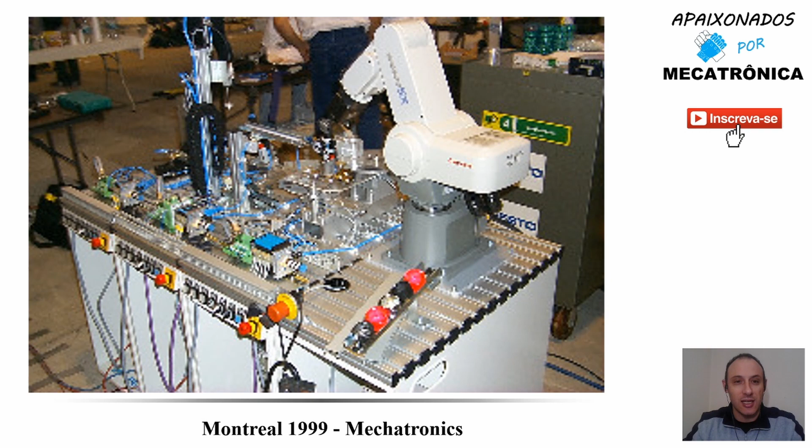Hello, Mechatronics lovers. Today, let's discover the details about the Mechatronics Competition in Montreal, 1999. Let's discover details about this test project and the reasons why these teams, Korea, Switzerland, and Brazil, finished on the podium. Stay tuned.

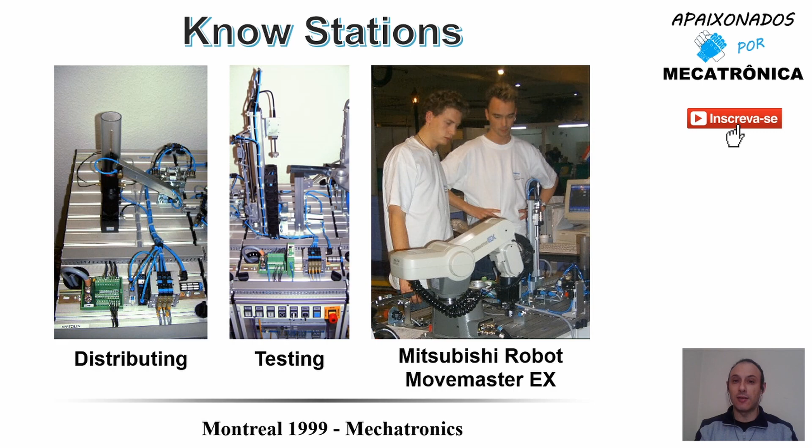So in 1999, we have the WorldSkills Competition in Montreal, Canada. In the Mechatronics Competition, we have 20 teams participating in Montreal. The stations were distributing, testing, and a Mitsubishi Robot Movemaster model. The unknown station was the filling station, responsible for delivering coins.

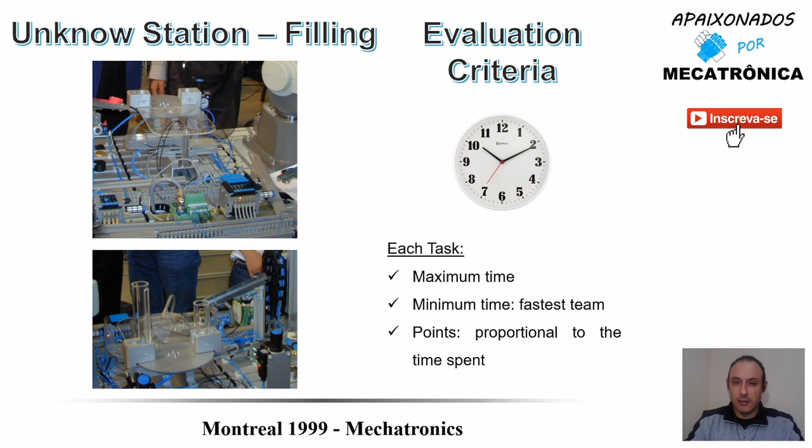The main, or only, evaluation criteria was time. Each task had a maximum time, and the minimum time was established by the fastest team. The points each team received were proportional to the time spent. If the team didn't finish the task, unfortunately they received 0 points.

So in task 1, the task is assembly of the distribution and test station, and demonstrating the function using SimuBox. The maximum time was 3 hours for 8 points. In the image, we have the Brazilian team, Adriano and Folha, in action.

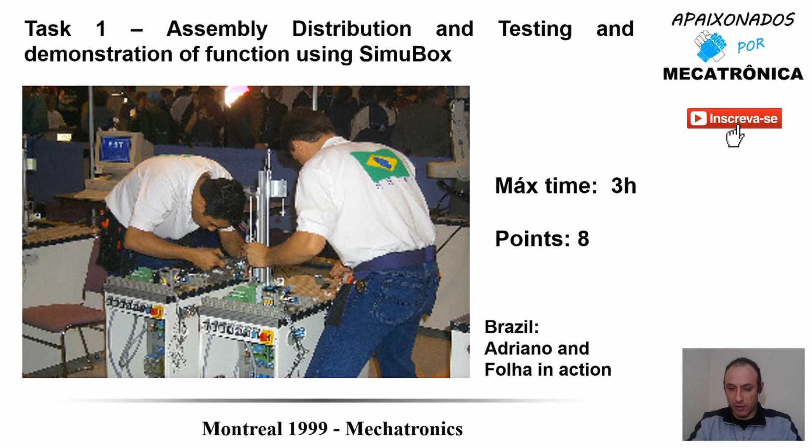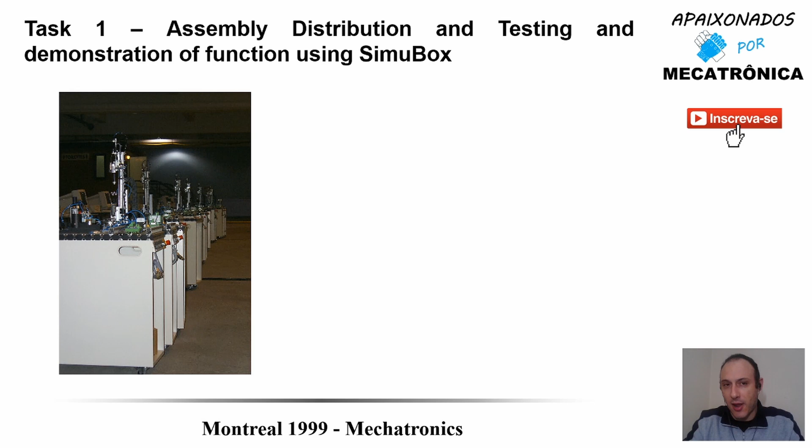During the familiarization day, these two stations, distribution and testing, are already assembled, and the teams test mechanical and pneumatic functions using a prepared standard software. In the second moment of the familiarization day, the teams need to disassemble the stations.

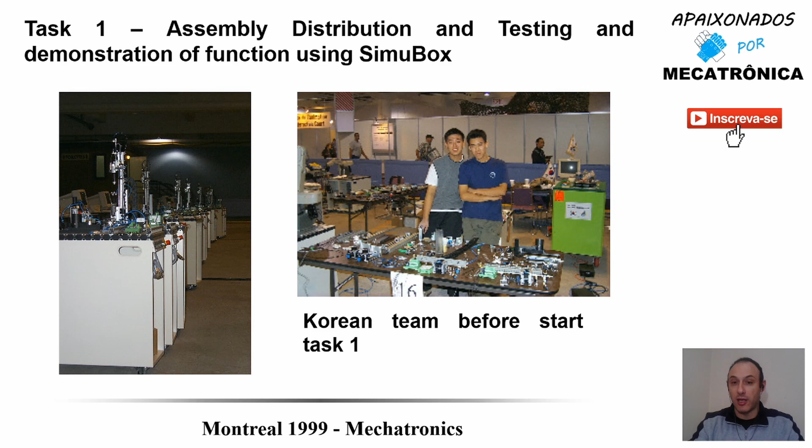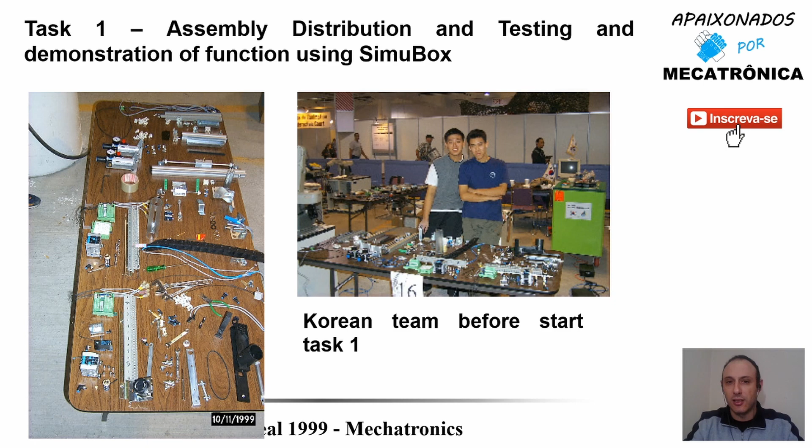The image shows the Korean team ready to start task 1, closer to the table, showing the level of disassembling the components. Today in WorldSkills, the disassembled parts are already prepared in a box. It's no longer necessary to disassemble any station during the familiarization day.

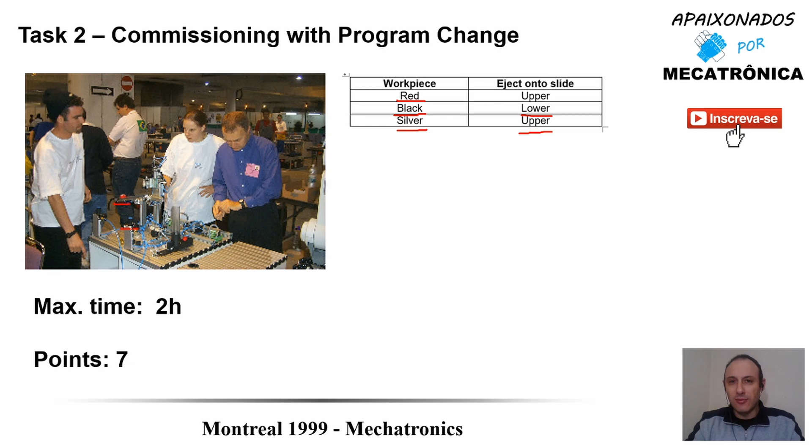Workpiece red and workpiece silver must eject to the upper slide, and workpiece black to the lower slide in the testing station. This is the upper slide and the lower slide — that's the normal function, and there are two more interesting functions.

Watchdog timer function for actuators of the distribution station — for example, the swivel drive. If the swivel drive starts the movement and doesn't arrive at the end position in 5 seconds, the system stops and flashes the lamp. The same applies for the vacuum. This is a good function.

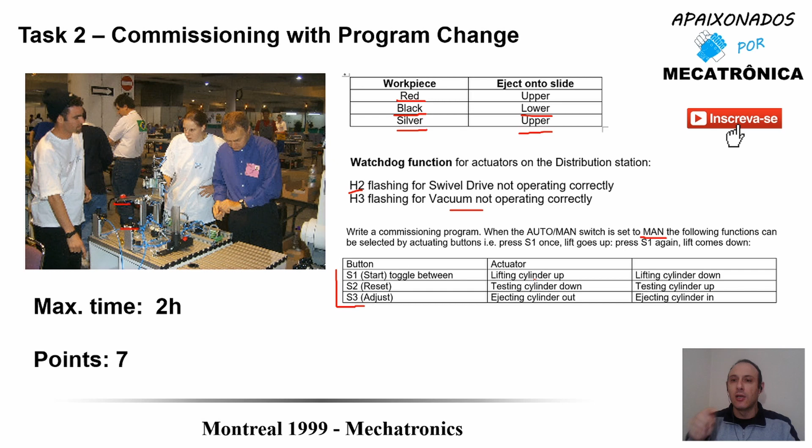The other function is the manual position of the switch — a test mode like that, using buttons S1, S2, and S3 to turn on or turn off the cylinders, the actuators of the testing station. One touch on start lifts the cylinder up, and another touch — this is named the toggle function — lifts it down. This is a very good function too.

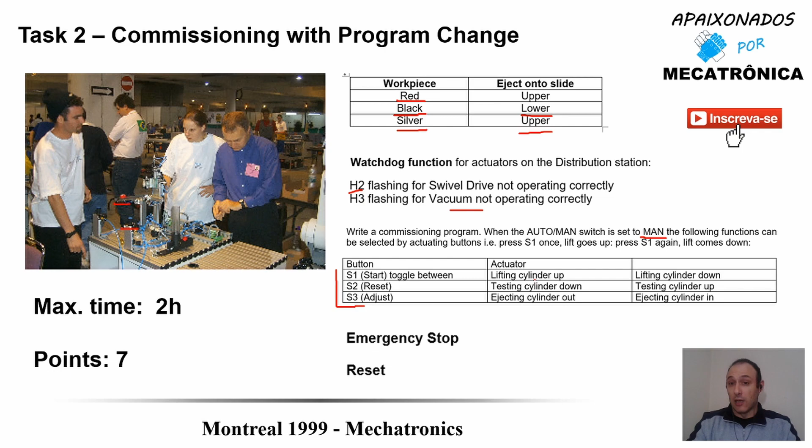And there are also emergency stop and reset functions — a lot of functions in 2 hours. The result was very impressive: Korea finished in 23 minutes, very, very impressive. Switzerland and Brazil finished in half an hour — very, very good.

So this was the results. I only showed the first 10 positions in each task.

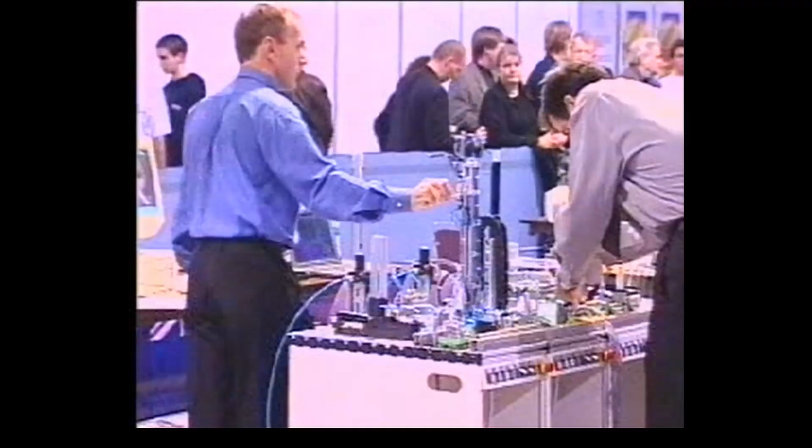The end task of the day was troubleshooting, individual, with a maximum time of 1 hour. How does this kind of task work? Experts insert non-destructive defects — mechanical, pneumatic, or electrical — and competitors must find and fix these defects, putting the system back to working order in the minimum time possible.

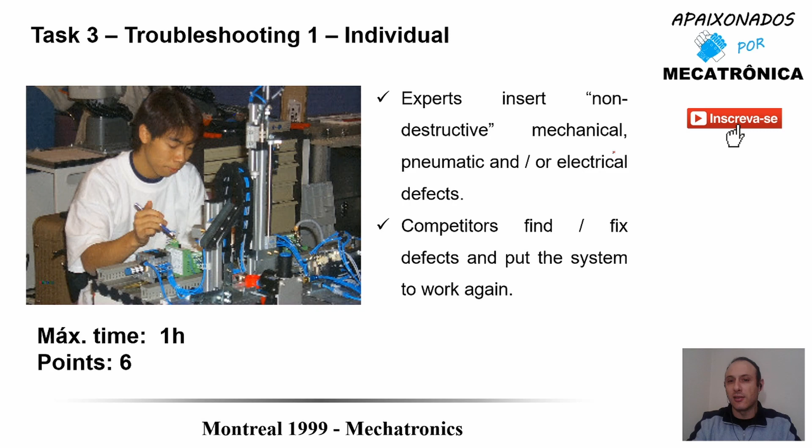Normally 3 or 4 defects were inserted into the station, and the result was very impressive — another impressive result. Switzerland spent only 5 minutes to finish, a very good time. Norway, Brazil, Korea, and Singapore finished in 7 and 8 minutes, also very good.

After day 1, with 21 points disputed, the ranking showed Switzerland and Korea in a tied first position — only a 0.03 point difference, basically no difference. Singapore, Brazil, and Taiwan scored more than 80%. This result from day 1 showed which teams were disputing the medals.

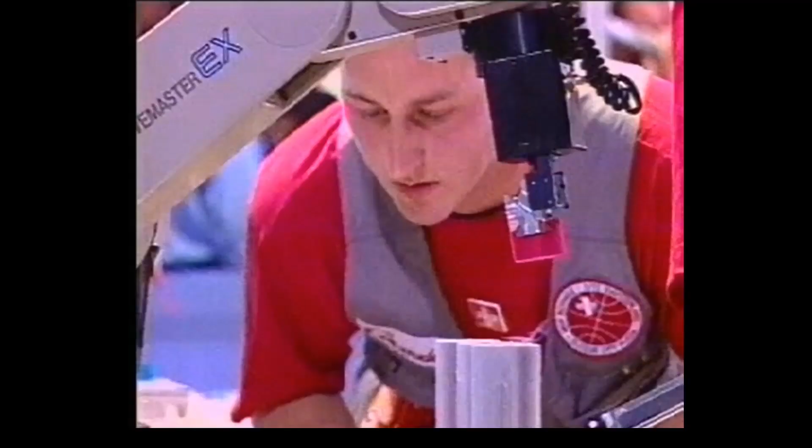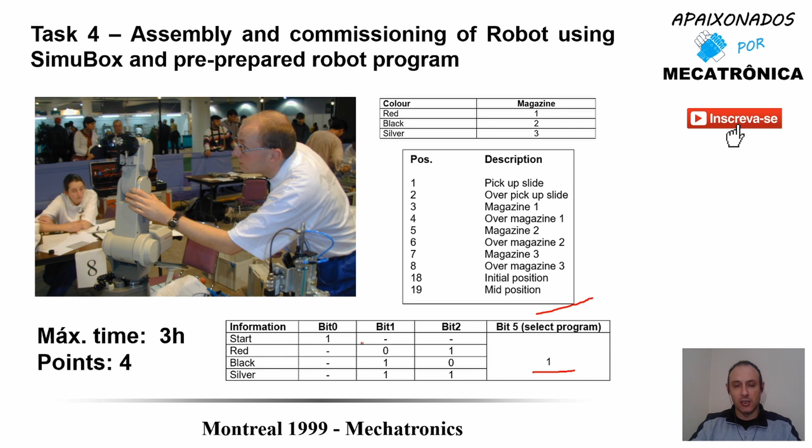Let's continue to task 4. Task 4 is assembling and commissioning the robot using SimuBox and a prepared robot program. The teams must teach the robot's positions according to a given list, using a pre-prepared robot program — selecting the program and inputting the workpiece information, so the robot will sort the workpiece into different magazines according to this information.

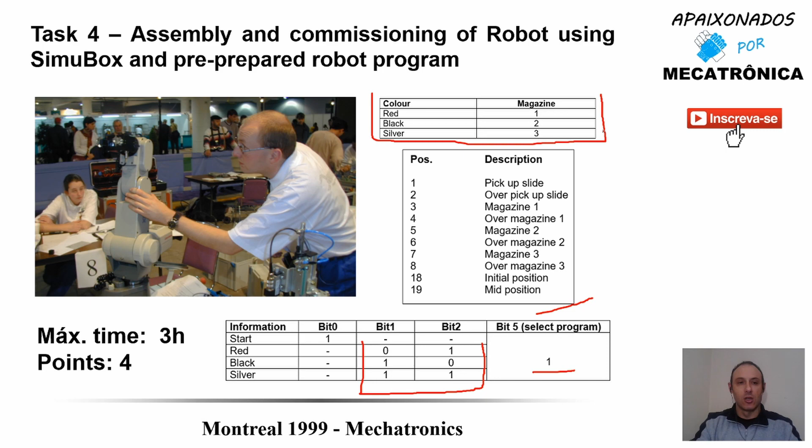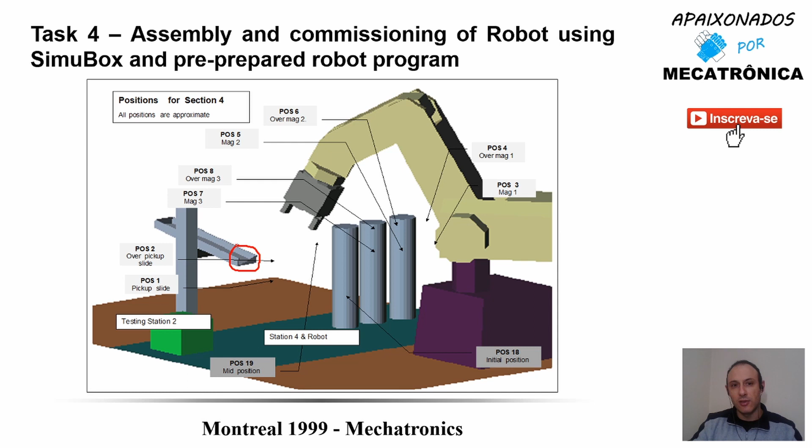Only 4 points and 3 hours to do this. In 1999, we already had CAD software, but at this moment it was simple CAD, and the information was on this paper. It's possible to see the positions and the components: magazine, slide, and robot. The robot takes the workpiece from this position and then sorts it into the magazines.

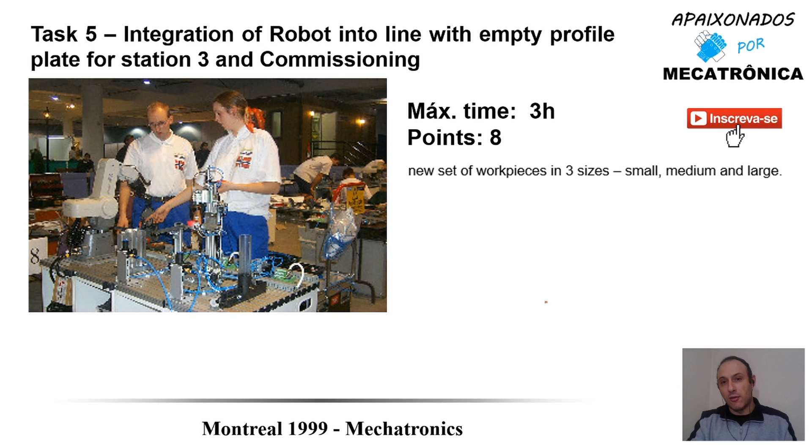Continuing, task 5: integration of the robot into a line and commissioning the system. This was a very interesting and very difficult task, because the line is complete with distribution, testing, and robot. But another point - not only the integration, the functioning changed, because new workpieces in 3 sizes were used: small, medium, and large, according to the height.

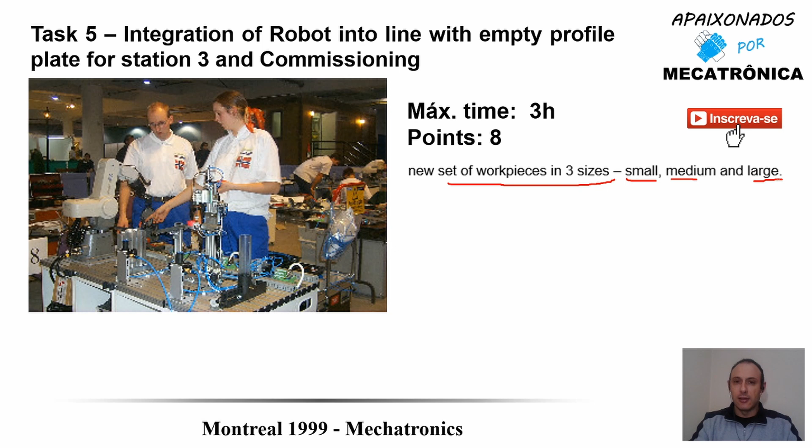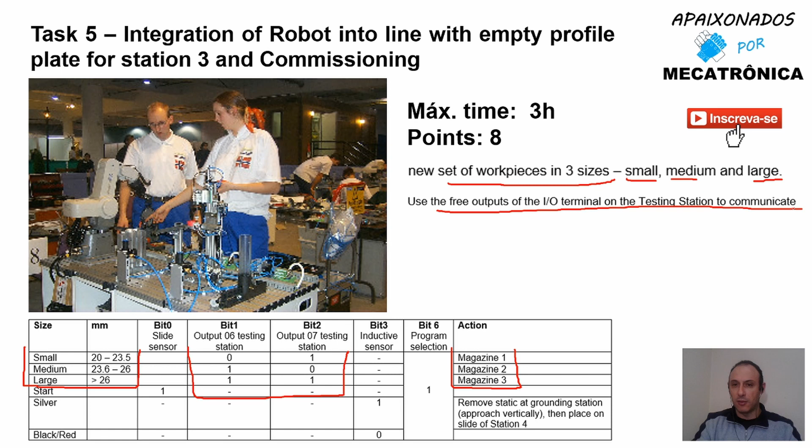According to this height, the robot must sort into different magazines, and the information about the height is communicated using the 2 outputs of the testing station. So they used the free outputs of the testing station to communicate this type of workpiece. Another point: the teams must move the inductive sensor from the testing station to the robot station. Why? Because the silver parts must touch the ground to remove static electricity. This was interesting. After removing static electricity, the workpiece must be placed in a slide in the robot station.

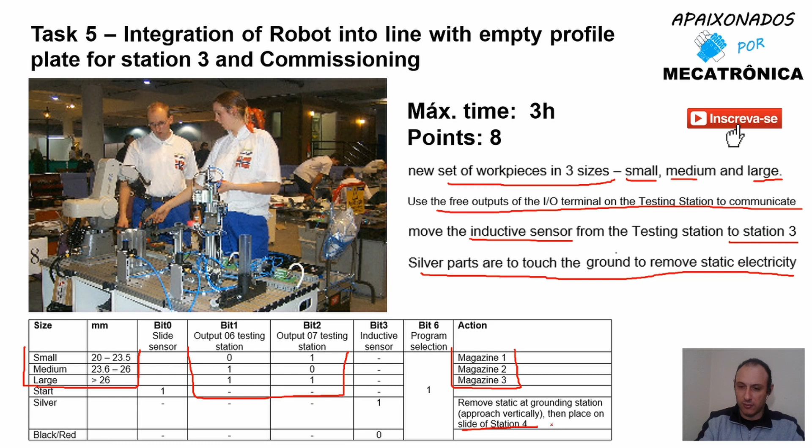So this is an overall image. The robot takes the workpiece here, checks if it's a plastic or silver/metallic workpiece using the sensor. If metallic, it touches the ground and then sorts it in the slide; if plastic, it puts it in the magazine. In the magazine it's sorted according to the height.

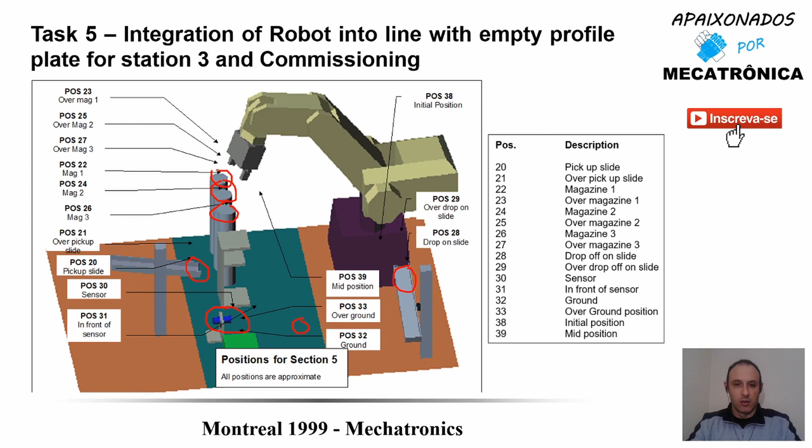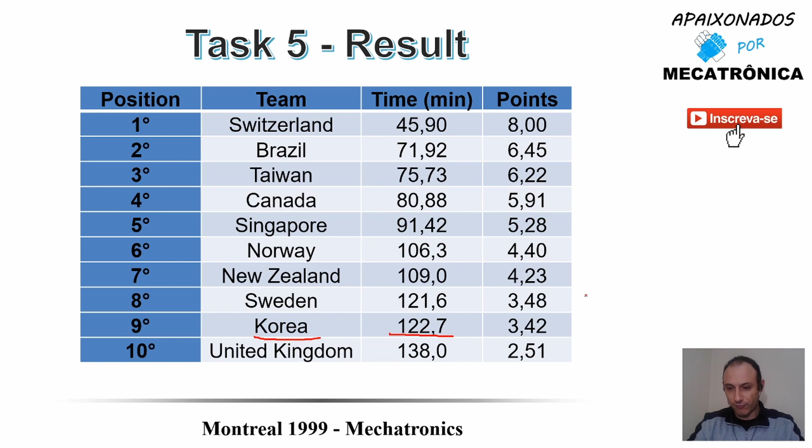So Switzerland was first, almost 46 minutes, and Brazil second, Taiwan third, and Switzerland was very good in this task. One point to pay attention to is that Korea spent more than 2 hours. It's not common - probably they had problems in this task.

So the second troubleshooting task was task 6, maximum time 1 hour, 7 points. But this was a different situation - in this task there was a minimum time. That means if the teams finished before 30 minutes, they received all points.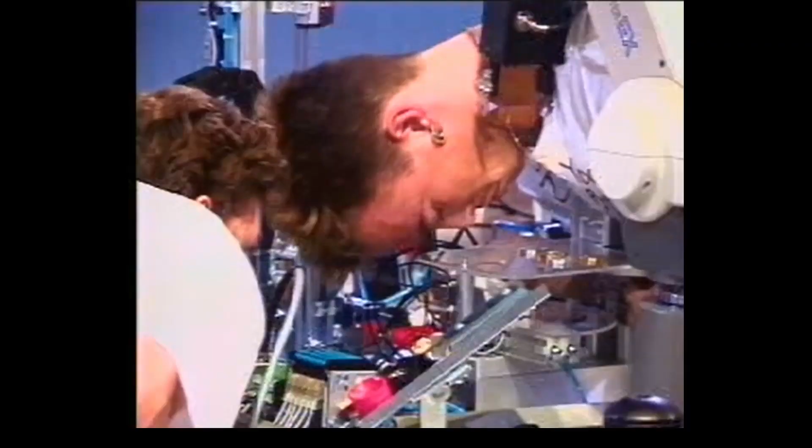So day 3, task 7: assembling station 3, the new unknown station, and demonstration using the SimuBox. It's possible to see here one team working, and probably the Switzerland team here already finished. This is the SimuBox that they use to demonstrate the function.

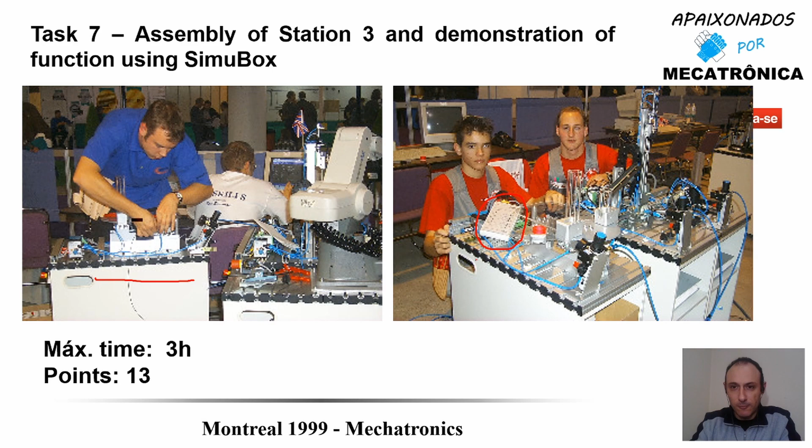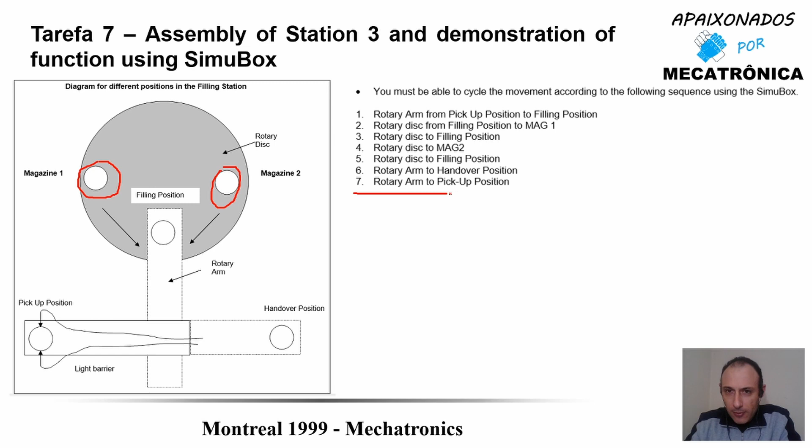This is the information in the task project about the station. Here we have a 3-position cylinder and a rotary disc. Here one magazine and another magazine used to get the coins, and this is the movements of the new station. So here we have the mechanical points. This cylinder is a 3-position cylinder, a special cylinder. What more? Here we have the coins, the silver coin and the gold coin.

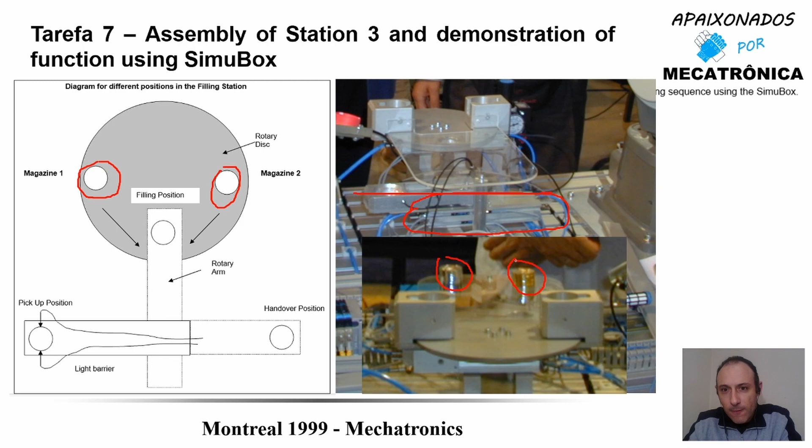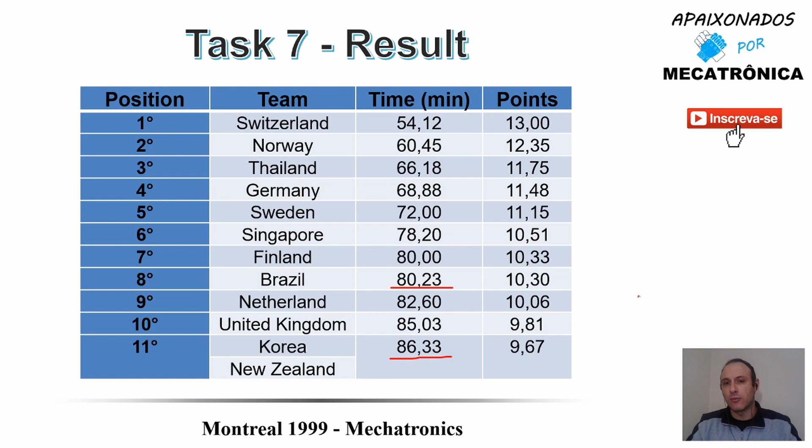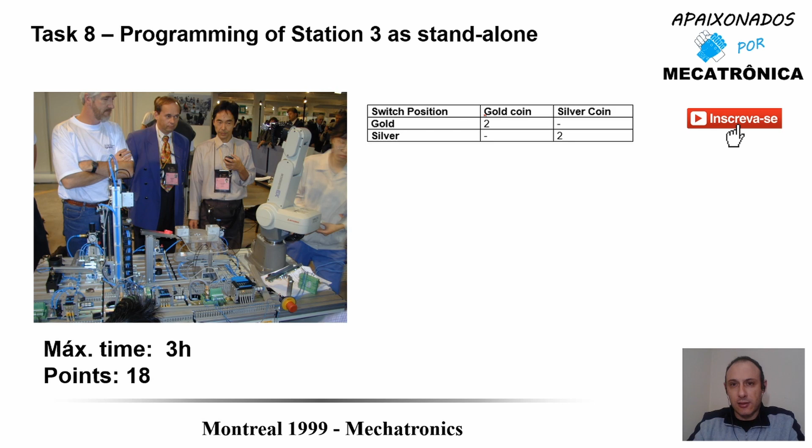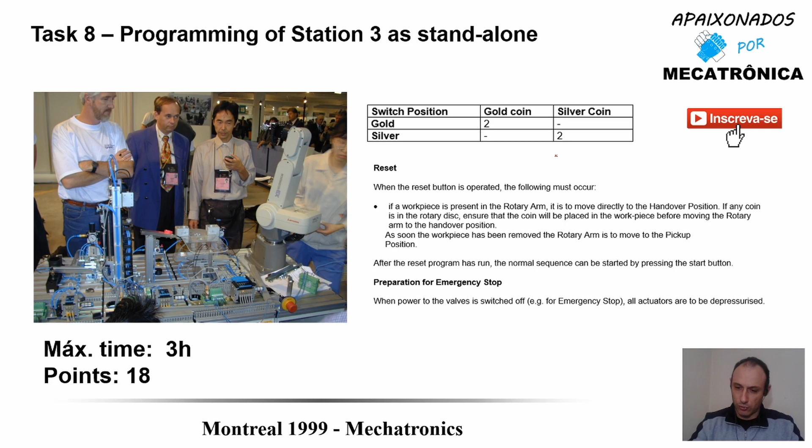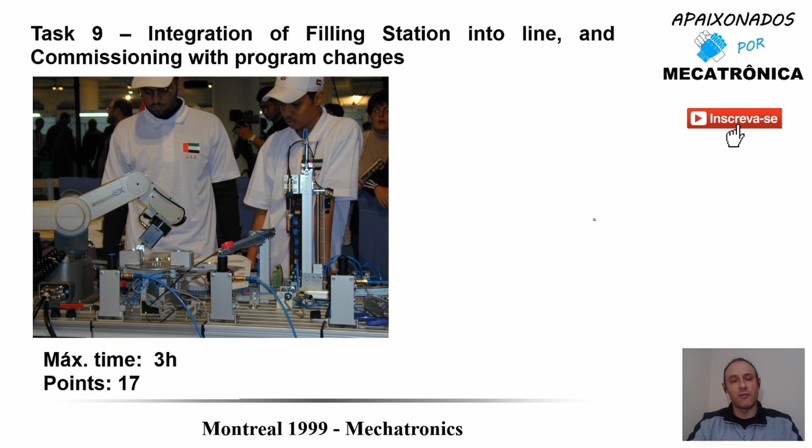And on the last day, task 9: integration of a filling station into a line and commissioning with program changes. This was a very difficult task, because we had some changes in the program. The system had to run in automatic mode.

The workpiece red receives, I don't know, gold or silver, but yes, can be 2 silver coins. Workpiece black receives 2 gold coins, and the silver workpiece receives 1 silver and 1 gold coin. And there is also an emergency stop function in station 3.

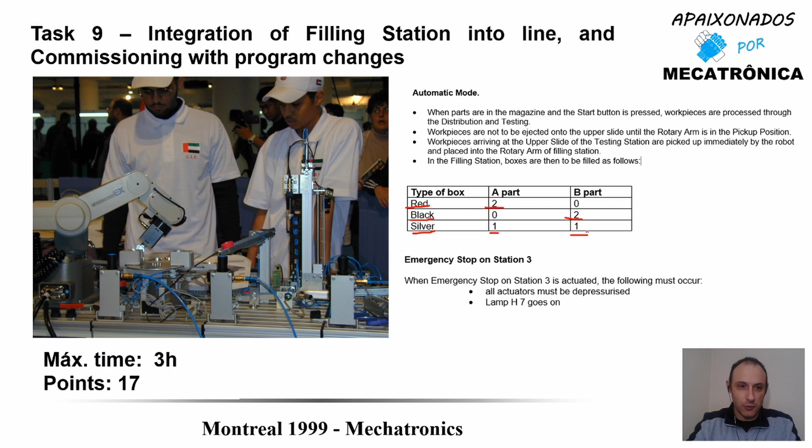So the functioning: after the workpiece comes from distribution and test, the robot takes the workpiece here and puts it in the arm. The arm moves to the middle position, and then the rotary disc rotates to put the coins inside the workpiece. Then the arm rotates again to the drop position, and the robot takes the workpiece here and puts it in the slide.

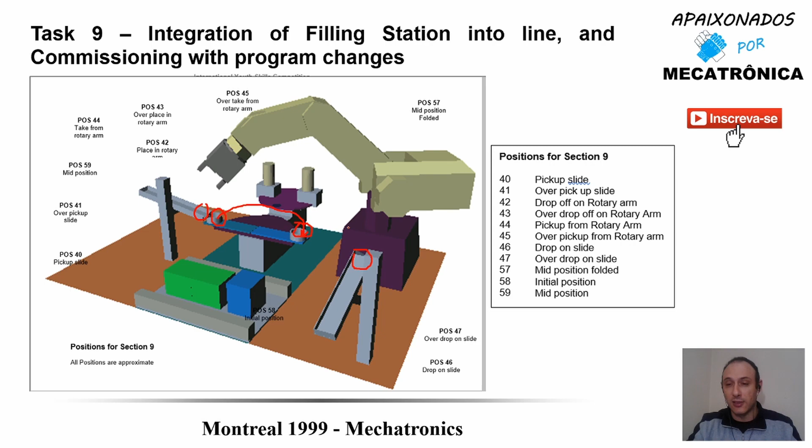This is the function of the system. So, some images about this task during the task and during the evaluation process.

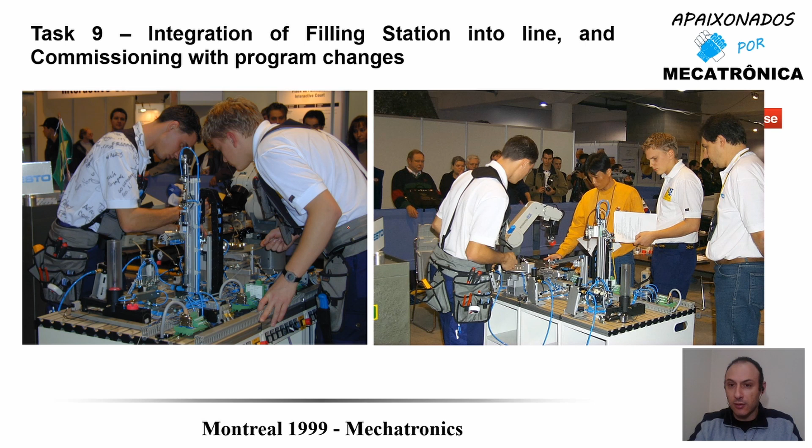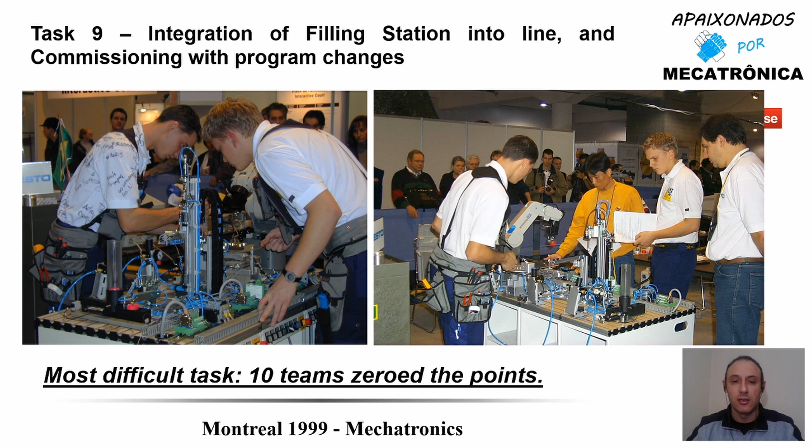So this was the most difficult task, because 10 teams got 0 points. 10 teams couldn't finish the task. And this was the result.

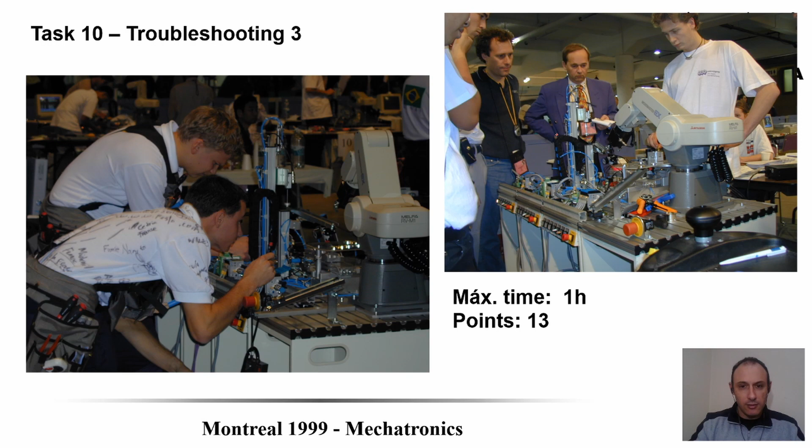And we have the last task, task 10, one troubleshooting task again, but in a group. And this was the result: Switzerland got first again. Switzerland won all 3 troubleshooting tasks.

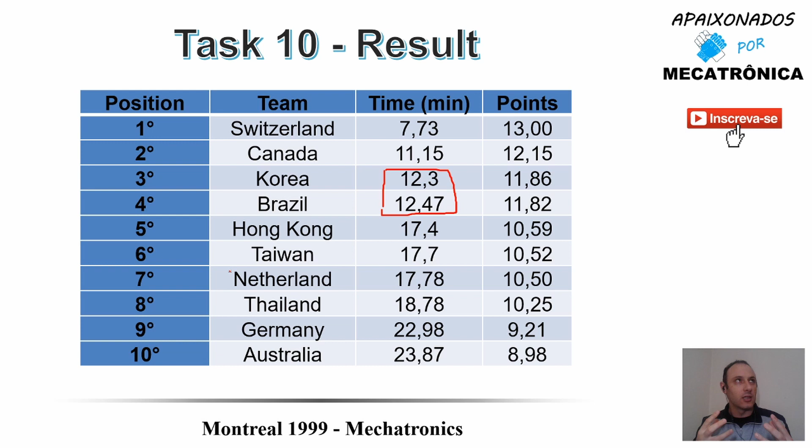Singapore, which was fighting with Brazil, but in this last task Singapore got 0 points because they used the second chance to evaluate, and in task 10 it was not possible to use the second chance. In other tasks...

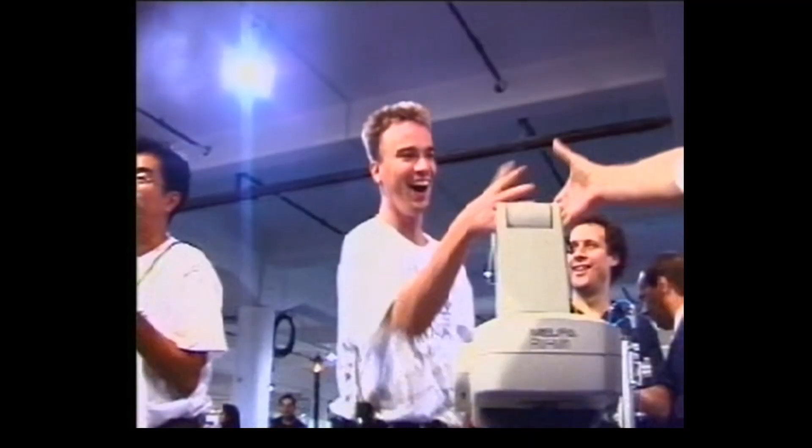if the team wants to show the evaluation, to show the functioning, and if something was wrong, it's possible to return, fix the problems, and show and evaluate again. But in task 10 this was not possible - it was only one chance. So this is the final ranking.

Some information about the teams. Switzerland won 6 of 10 tasks, which was very impressive, and won all 3 troubleshooting tasks. Korea won 3 of 10, but won the 2 tasks with the highest score, which were task 8 and task 9.

So, on the last day, Korea went to first place. So these 2 teams were the very best teams in this competition.

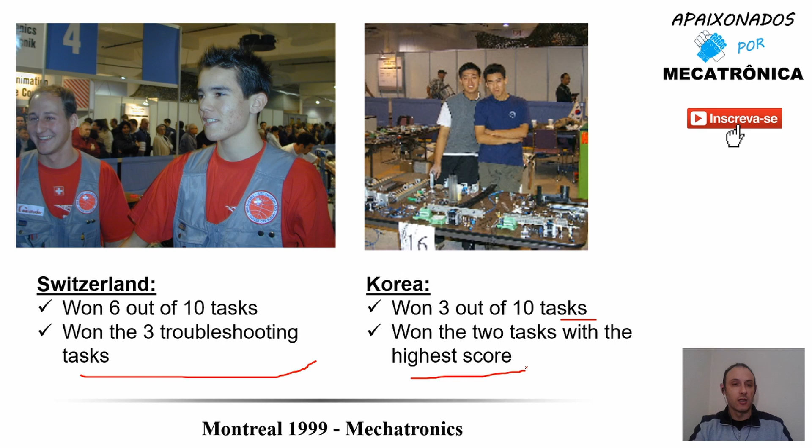So, Brazil got the bronze, and what's the reason? Because in my opinion, it was the balance and constancy in the competition. Brazil finished all tasks in the middle, or second, third, or 5th place, and this constancy was very important. Only one task did Brazil finish in 12th place, but in that task the points were small.

So this is the historic ranking in the first Mechatronics competitions. I put the results here. The first gold medalists were Germany and Norway in Taipei 1993, and Korea started competing in Lyon and got 3 golds in sequence.

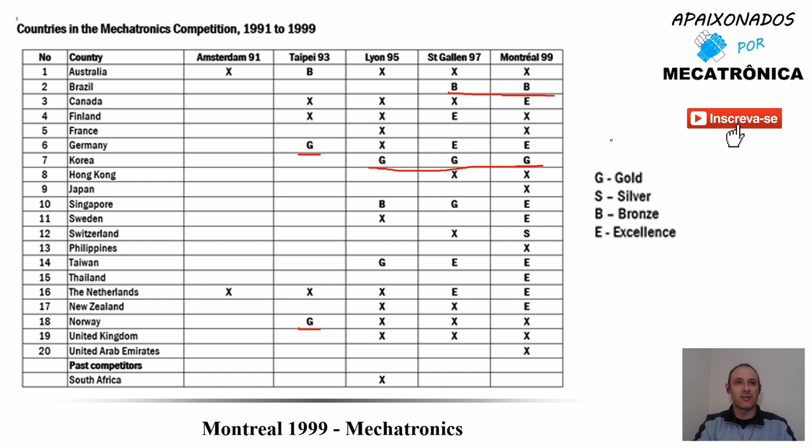So I hope you liked this video, you liked these stories - you have the history behind this podium, the details about the projects and the teams.

Congratulations to Brazil.